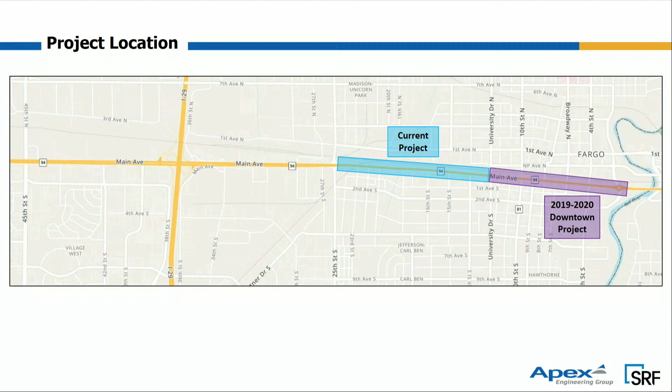Hopefully these stick drawings are not too hard to understand, but we wanted to develop a little bit of what the context is surrounding this corridor. As I mentioned, there's 4 miles of Main Avenue within the city. So if you look at the top of the slide first, 45th Street to 25th Street, of course, has the 6-lane section. It's got 3 lanes in each direction. You have raised median, you have turn lanes through that whole area.

And then to the east of our project, the mile that goes from University Drive to 2nd Street, a little bit different section there. Of course, a lot of you are familiar with that, but we ended up with more of a hybrid section there. As you can see on the east end of it, it's more of a 3-lane section, 1 lane each direction with that center shared turn lane. And then as you head west, you develop that second through lane. Of course, there's some parking mixed in there as well downtown. But it's kind of important to understand the context of these surrounding corridors when we talk to you today about some of the things that we're looking at for this particular mile stretch of Main Avenue.

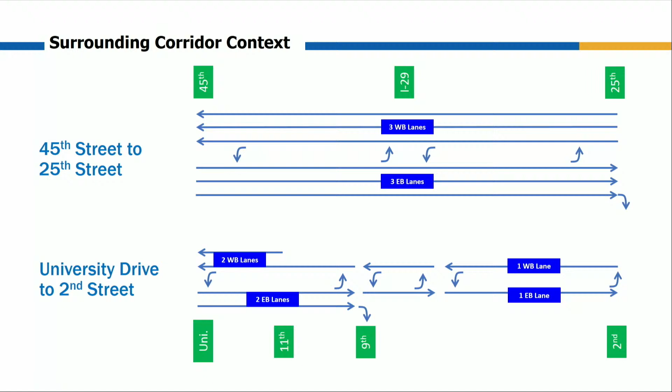So with all these projects, we always start working with our project review committee team on establishing the true purpose and need for the project. Really, what are we trying to accomplish? And we did go through a lot of versions of this and worked for a few months with our project review committee. But it kind of boils down to these 4 items in more of a general sense. And I did want to highlight bullets 2 and 3 in particular.

One of the things we really want to try to do out there is improve the pedestrian environment. Anybody that has walked out there or tried to take a bicycle or something like that understands how tight some of those sidewalks are. There's an example photo here on the lower left. You can see there's only about 28 inches there between that International Market Plaza building wall and that pole that's right on the edge of the curb there. And then, of course, somebody threw a box in the way too, just to make it even more difficult in this particular case. But this is something really important to the project team to look at opportunities to improve this environment.

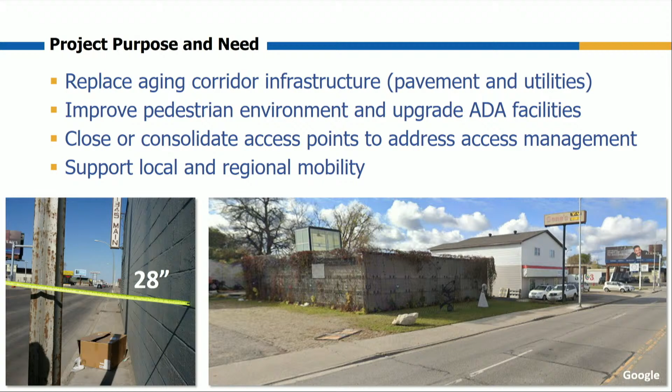You can see the photo here. Within this 200-foot stretch, there's about 5 driveways. You can see the curb just goes up and down constantly. So we've been working hard to do that, and Jake's going to present a little bit of information later on how we've been successful in trying to close some of those driveways.

So schedule and cost are always big topics, of course, on everybody's mind. So I wanted to just highlight these for you here today. So right now, our project schedule is to have this bid ready basically 1 year from now. That's our current schedule. So the project would bid probably sometime under this schedule in late 2023, November, say, of 2023. It would go to construction in 2024 then during that construction season. And again, that's our current schedule. We'll circle back to that at the end and talk a little bit about some things that could affect that.

And then as far as cost goes, right now, the DOT, of course, with this being on the U.S. and state highway system, they program these in well in advance. This was programmed in 7 years ago at about $15 million, and that's the amount that's programmed into what the DOT calls the STIP. And I've kind of broken that funding down for you here on the chart, and we can certainly answer any questions about this later if we need to. But you can see there are federal funds on the project, and then you have the state and city matches, and then you do have the city-only costs, which are typically for water main, sanitary sewer, things like that.

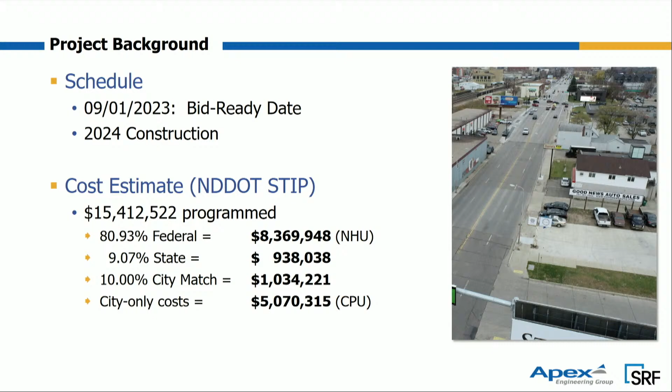Just on that quick question. Yep, absolutely. On 32nd Avenue, we found our costs went up quite a bit to $20 million, right? Mm-hmm. That $15 million you have, is that with inflation or you're going to tell us right now?

It's a great question, Mayor, and I was going to touch on a few of those things here with this slide. So that estimate was done in 2015. That's just kind of the way that the programming process works. It's kind of an understatement, I think, to say that those costs are very likely to increase. Of course, we all know what's going on in today's environment. So I think the question then is, well, how would that additional project cost be funded? And I've tried to list out a few bullets there.

Right now, it's hard to know exactly how it would be funded, but the good news is that those NHU funds, which is the federal funds, those are not capped. So if there is more money in that pool, which of course is not always a certainty, but if there is, there's opportunities to get some additional federal funding there.

But that would have to be matched with those same state percentages and city percentages that I showed on the previous slide. And then of course, any costs on the city-only items, which would be the water main and sanitary, those would be 100% city as those costs rise. So we're definitely aware of that as a project team. We are working on developing new preliminary estimates. We expect to have those done within the next month or so, and that's going to give us a lot better idea of where we stand there.

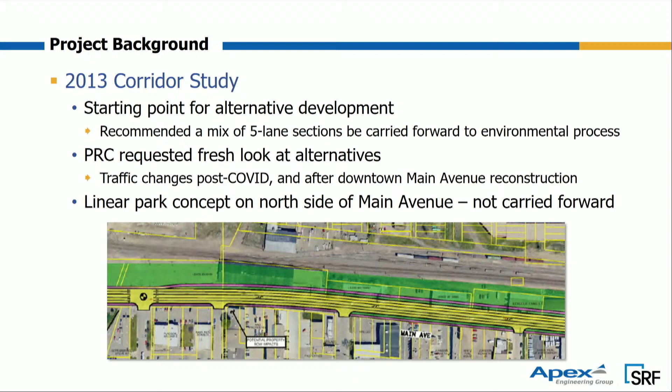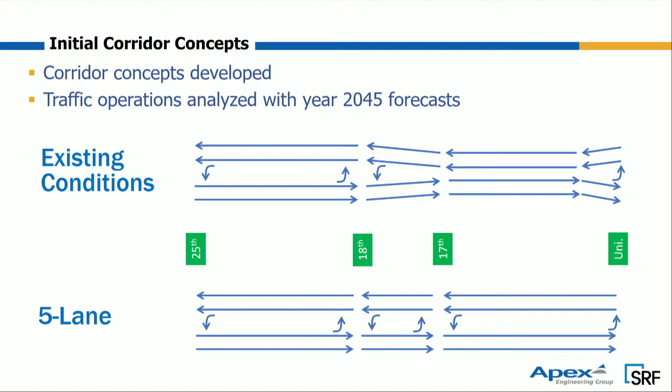We had the existing conditions, which essentially is what's out there now: 5 lanes west of 18th Street, 4 lanes with no turn lanes east of 18th Street. And then we also looked at a 5-lane, a 3-lane, and a 4-lane, and again just applied those with a broad brush to see what that did to the whole corridor. And it boiled down really to two bullet points there at the end. The no build and the 5-lane concepts had acceptable operations and no congestion. The 3-lane and the 4-lane concepts, when we applied them to the entire corridor, we saw poor operations, delays, and long queues.

How does that translate into calmer traffic in pedestrian, bicycle, people safety? As far as which section? The traffic flows, the number of lanes, the speeds, I mean, I hear you. When I hear you say poor operations, delays, and long queues, some of those might be beneficial if we're looking to calm the traffic, slow the traffic, and enhance bicycle, pedestrian, people safety. So I'm just curious what you...

True. And that's that balance, trying to balance all those needs of moving vehicles through the corridor and providing access to all the businesses that are along the corridor. But like you said, making sure that we create an environment that's comfortable for all users, not just vehicles, but pedestrians as well. I guess my question then is, did we build assumptions in that are to speed things up, or did we build assumptions in that are to slow things down, or to calm traffic down?

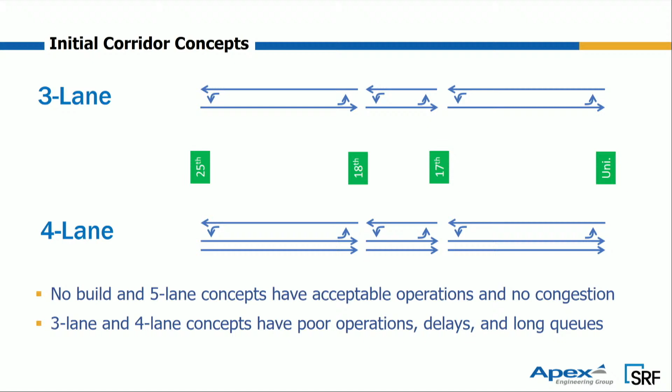So related to your question, Commissioner Preston, about vehicles doing different things when you go to a 3 or 4 lane concept, one thing we noticed that we would expect is that vehicles would start to divert to other roads. Our traffic team put this together: with a 3 lane, through the entire corridor, you'd see about 3,000 vehicles divert off to First Avenue North or Fifth Avenue South or other parallel routes. With the 4 lane, it was a little bit less, 1,500.

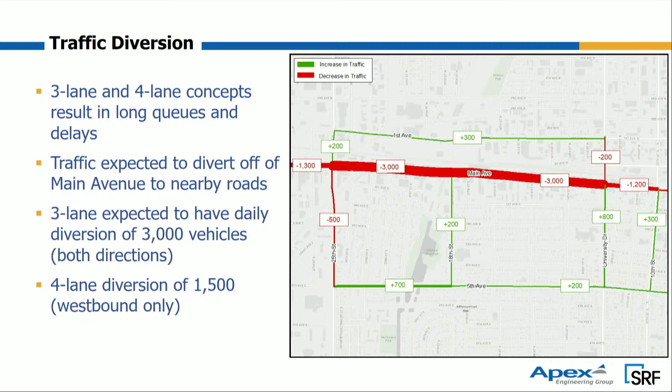So again, it's just driver behavior. If we do create that congestion in the corridor, they're going to look for other routes. So that was really our broad brush painting of everything. Then we wanted to dive a little deeper and see if we can use some of these components to build alternatives that make sense, because as I mentioned earlier, we have a really tight right-of-way east of 18th Street. So we wanted to see if there were some things we could fit in that section that might make sense.

And I know there's a lot here to digest, but bottom line, we broke the corridor up into components: the intersections and the portions between them, 25th to 18th Street and then 18th to University. The items in blue we carried forward to build our alternatives, which Jake's going to talk about in a minute. We also looked at the items shown in gray.

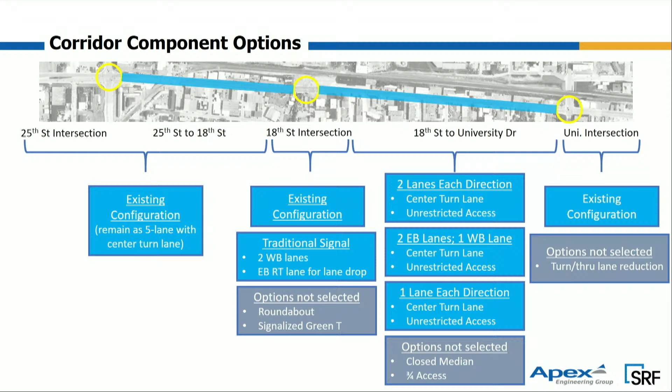We did want to look at some alternative intersection treatments such as roundabouts, and something called a green T, which I don't believe there are any of in Fargo yet, but it's a treatment used at T intersections sometimes. We also looked at raised medians and controlling access. Ultimately, though, the project team decided not to carry the items in gray forward.

So I'm going to sum up here and then turn it over to Jake, and he'll tell you about the alternatives that we actually did start to move forward with on the project. But to try to sum up some of this traffic analysis information, the current lane capacity, again, for vehicle traffic is adequate for the 2045 traffic. We don't have to add more lanes for vehicle traffic. However, if we try to reduce by 1 lane throughout the entire corridor, we start to see some operational issues.

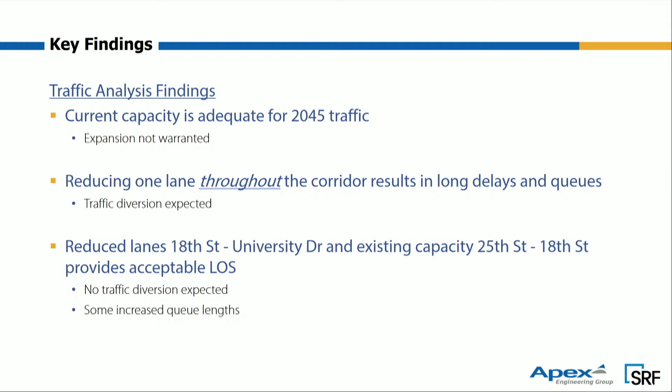But if you look at the third bullet there, we can combine those things. If we use the existing capacity west of 18th, but we look at reduced lane sections, something a little different than what's out there east of 18th, we did find that did provide acceptable level of service, which was what Jeremy was mentioning earlier. And with that alternative, we didn't see the traffic diversion because we still had that capacity from 25th to 18th Street. So those are kind of the takeaways that we found from that.

A couple other items here too. The crash history on the corridor is higher than average, but it's below what is considered critical. So there wasn't any immediate safety needs out of that related to the crash history, but we of course want to build as much as we can into our designs to improve those situations. And then I already mentioned the high number of access points, and Jake will talk a little bit about that here too. So with that, I'll turn it over to Jake.

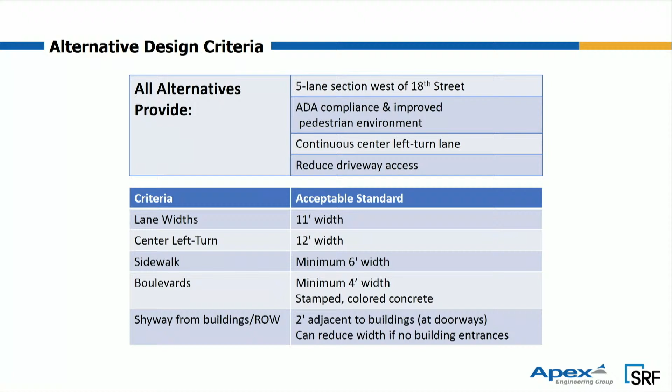All right, thank you, Matt. So we'll get into what alternatives we're starting to bring forward through this process based off of the results of the traffic analysis. Would like to point out that there are some goals based off that purpose and need that all these alternatives were developed to hit. And as Matt alluded to, we broke this corridor out into two different segments, from 25th to 18th, and 18th to University, based off the difference in the corridor widths of the right-of-way that's out there, with 18th to University being more of that constrained section.

So all the alternatives will have a 5-lane section. That's 2 lanes each direction with a center turn lane from 25th to 18th. That's currently what's out there today. But we will be making improvements to that segment of the corridor. ADA compliance will be improved as well as the pedestrian environment for all the alternatives. We will be providing a continuous center left turn lane. So that's a 2-way left turn lane down the middle for all of our alternatives. This allows vehicles to turn left and not block the flow of traffic.

If you know, that 4-lane section between 18th and University today does not have any designated center turn lanes. So anybody trying to turn left into any of those accesses has to do so in the travel lane. So those left turns, you're probably primarily talking westbound traffic heading south of Main. There's not much reason to go north of Main, or hardly any access points to go to. Well, there are accesses on the north side of Main. So you're talking like to the businesses? The businesses, correct, yes. So this will provide a safe way for the vehicles to get off of the travel way to wait to turn left into the businesses.

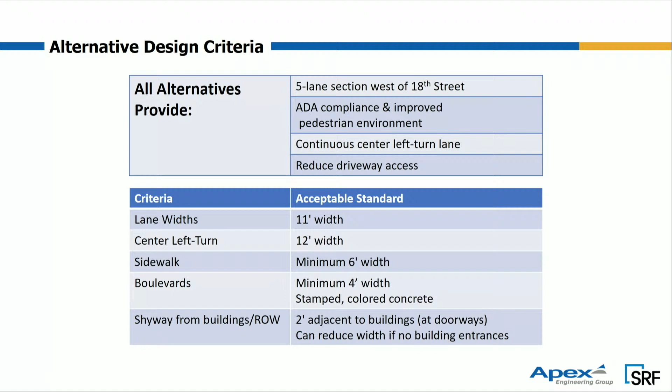So that provides a 4-foot separation from the back of curb to the sidewalk from oncoming traffic along Main. And then also where there are buildings, we do look to add an additional 2 feet of width to that right of way or to that building to provide more separation, so you're not so condensed in that walk area.

So with the alternatives, we developed 4 different alternatives. Actually 5 alternatives, but one of them being the no build, which is basically the do nothing option, which is an option that needs to be carried forward through the environmental process. So with this option, no changes are made, everything stays the way it is. Obviously, this does not meet the purpose and need of the project, but it is an option that we do have to carry forward to evaluate for the environmental process.

The 5-lane section, and again, all these alternatives between 25th and 18th are going to remain the same as far as the number of lanes, that 5-lane section. So really the discussion is going to focus on that corridor area between 18th and University, the eastern part of the corridor. But with alternative B, 5-lane section, this does carry the 2 lanes, both eastbound and westbound, through the entire project corridor with that center turn lane.

And as you recall from the corridor study, there were different options for this 5-lane section with shifting the alignment of the road to impact one side or the other more. But looking at the corridor, we are splitting the impacts between the north and south. So the alignment of the road does not change much. It may change a little bit depending on where we need to minimize impacts to the properties to the north and south.

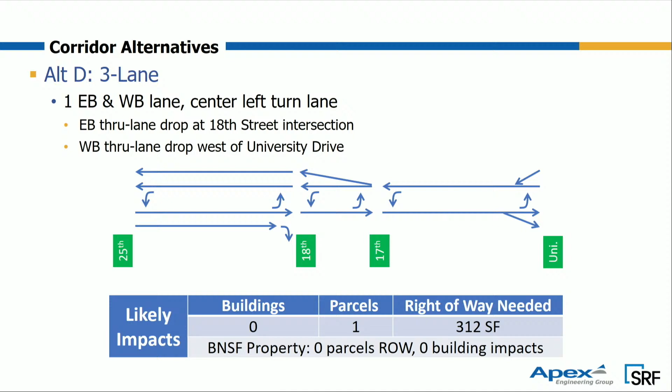We did also look at a 3-lane section, what we could do to reduce those likely impacts. So this option is being carried forward to look at as well, keeping in mind that we reduce some of the impacts, but not all the impacts from a right-of-way standpoint. But it also does reduce some of those widths for the pedestrian environment. And I'll go through those here next.

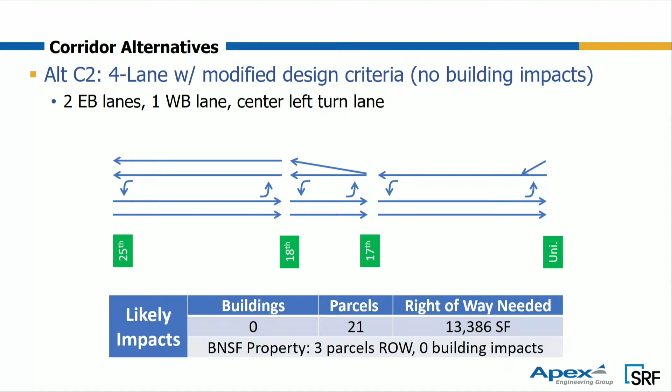So again, this is the same option as alternative C1, the 4-lane, just modified to reduce the footprint a little bit to minimize some of those likely impacts. And what those are, again, we're still meeting the criteria that we wanted to meet with the purpose and need, but we would reduce the outside lane width, so that's the furthest north and furthest south lane, to 10.5 feet. You'd still have your 2-foot gutter to the curb, but that 10.5 feet would be reduced. The center left turn would reduce from a 12 to 11 foot.

And then the sidewalk widths, the minimum sidewalk widths that we would try to shoot for in those constrained areas is 4-foot width with a narrower boulevard. And there's different widths that go along this corridor. We would still try to hit the desired, which would be that 6-foot walk with the 4-foot boulevard.

But in the areas from that picture that Matt showed in that constrained area, we got a building on the north and south side, some of those pinch points. That's where that flexibility with the design would allow us to narrow up the sidewalks and the boulevard to fit it within the existing corridor as best we can. But once you get past those constraints, then it would go back out to the desired section.

So where would bicycles go? On the sidewalk? Or do you anticipate they'd mix with the traffic flow? The bicycles would go on the sidewalk. This isn't a bicycle route. I think there's designated bicycle routes on First Avenue South. So we would want to direct them there if at all possible, but obviously you can't control that.

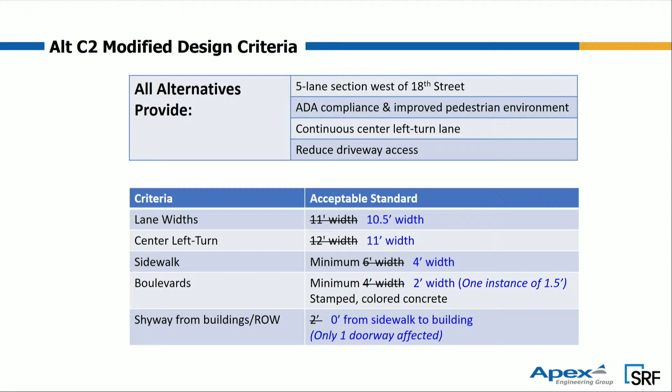Right, and in these constrained areas too, where we would have to reduce those widths to minimize those impacts, we wouldn't have any vertical obstacles in that reduced width section, light poles or any of that. There wouldn't be an additional obstacle for pedestrians. Those would occur after those constraints. Yeah, I'm just trying to get it in context, 4 feet versus 10 feet. No, I think the next slide is going to be a good one for you.

Yep. So we did go along the corridor, and this is actually on the corridor that was just completed here a couple of years ago to really give that context of what would a reduced section look like versus that ultimate section that you're wanting to achieve along the corridor. So here's just one person walking. You can see on the very far left, this is a 7-foot spacing between the back of curb and that structure, that building. It's a narrow boulevard. You have about a 5-foot sidewalk in this segment.

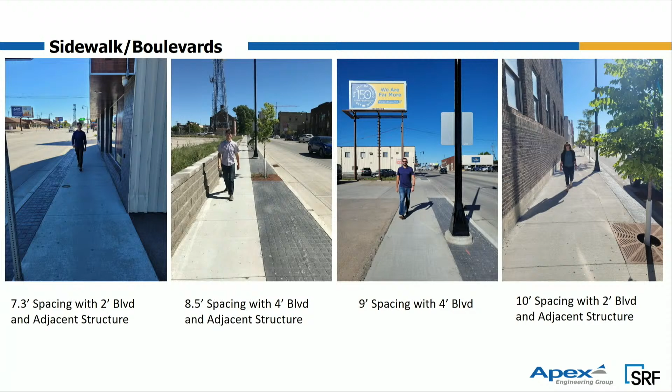Other one here, you got 8.5 feet from that retaining wall. You could assume that's a building too. In this circumstance, you have a 4-foot boulevard and then a 4.5-foot sidewalk. And then as you go down the line here, the wider options obviously provide a better pedestrian environment. And then we also did look at what it would look like side-by-side, 2 pedestrians passing each other along each of these different segments. So as you can see, the wider the sidewalk, obviously the better it is for the pedestrians passing each other.

So the one thing just to note is the segment we're talking about wouldn't have on-street parking. Right. So in downtown, we have primarily parking to protect the pedestrians, sidewalk to moving traffic. In this stretch, we wouldn't. So it's just something to think about as well. Yep, that's correct.

So the one on the far right, there is a 2-foot boulevard, but you can kind of see the jointing there when you look at the tree planter. If you would bring that boulevard all the way to the edge of that tree planter, that'd be your 4-foot wide boulevard. So that's your 6-foot walk with a 4-foot boulevard segment that we were discussing earlier.

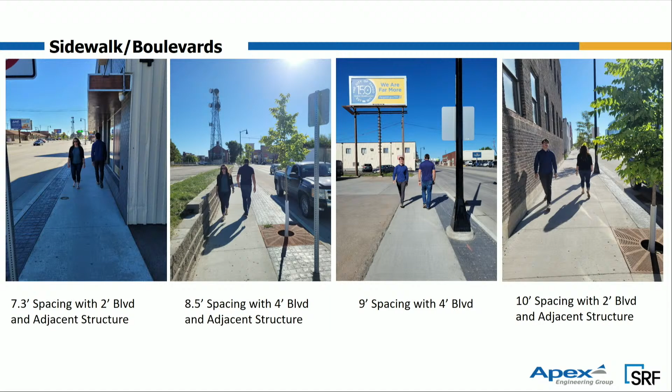And then talking about access management, there are approximately 80 driveways along this mile stretch. We did work very closely with the property owners, the business owners along this stretch. We held workshops that we invited them to come and discuss with us their property, how they use their property. And we also identified, if they have multiple access points within their property, are there opportunities to minimize or combine access points without impacting the operations of their property and their business.

And as a result of that, we were able to close 21 of those 80 driveways, and we're still working with some of the landowners on 8 of them. So that's potentially a reduction of 29 driveways, or a 36% reduction of what's out there today. It's been a really good process, and the property owners have been great to work with, and very, very helpful and easy to work alongside us on this. And those property owner conversations will continue throughout the project development as alternatives are selected and locations of driveways are finalized.

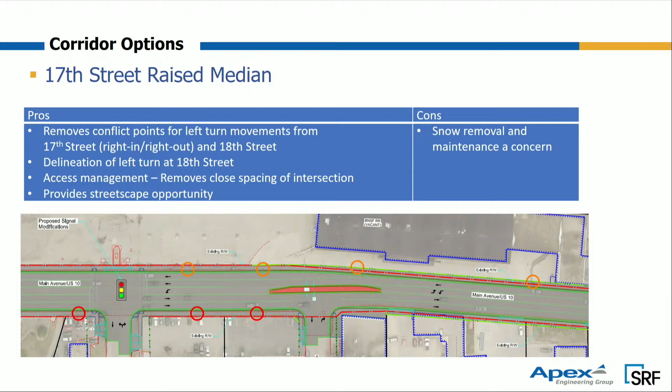And then streetscaping opportunities: depending on the section of the sidewalk and the boulevard, we are looking at providing landscaping opportunities along the corridor. These are just some of the criteria. There are a number of billboards along this 1 mile corridor as well that restrict any plantings within a certain zone as you get close to that billboard. But we are looking at these different options of planting beds where possible.

With some of the constraints, the planting beds are a little bit less of an option, but there are some options to add those. But tree grates, adding some trees along the corridor, and then also parking lot separation too, when there's parking lots adjacent to the sidewalk. We're looking at different options to separate that a little more.

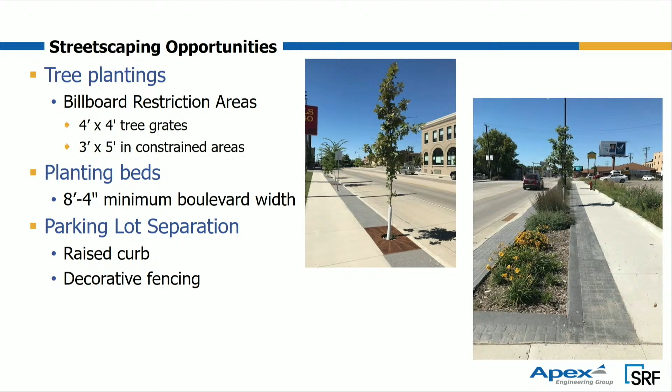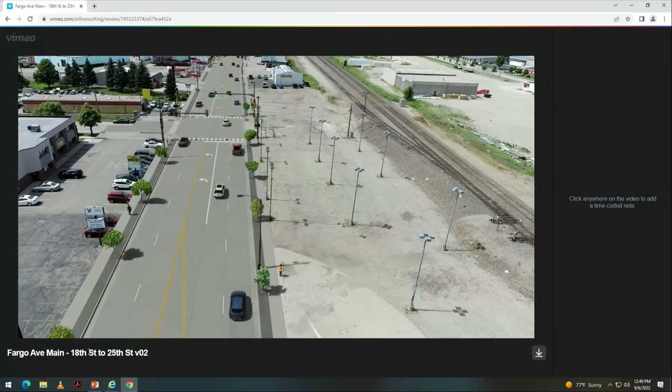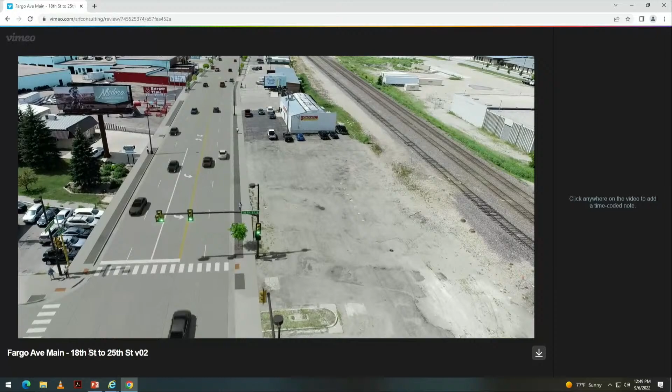So you're approaching 18th Street here at the signalized intersection. With this option, you have the 4-foot boulevards with the 6-foot sidewalk and tree planting options. These tree planting options aren't finalized by any means. It's just representative of what could occur out there. This will go all the way to 25th, but we're not going to run it that far, but you can see the different driveway locations along the corridor. This does include where we did reduce some of those driveways, so those would be represented on here as well.

All right, and then lastly, for mine, we are in the process of analyzing and comparing these. The top example is what was used for the last project between University and Second Street, really identifying what are those characteristics we want, what are the evaluation criteria. And below is some of the criteria that we developed as part of this corridor that we're going to be evaluating. And we're going to do the same thing. We're going to have a little bit more detail as far as how we develop the criteria and analyze it, but the color coding system, which is great, moderate, or poor, of how it meets the purpose and need of each of those evaluation criteria.

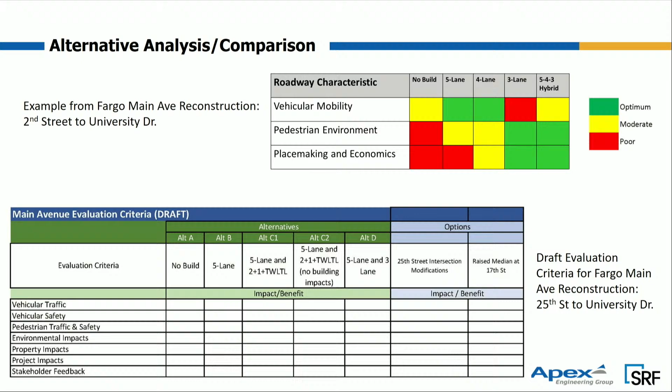Okay, thanks, Jake. I promise you we're almost done. I've just got a few other slides here. We do appreciate your patience and the questions too. It's really good discussion. So I just wanted to highlight a few things to be aware of.

We've talked a lot about some of the alternatives, but Jake alluded to it. Public involvement is very important to us on this project. We've worked hard from the beginning to try to do this the right way and get off on the right foot with all of the businesses and properties and neighborhoods. So just wanted to highlight some of the things we've been doing.

We, of course, met with the businesses and landowners a couple times. We've spoken with the board of the Jefferson Area Neighborhood Association, which of course is the neighborhood directly to the south of Main Avenue here. And then we do have our first public input meeting planned here for October 18th. So that's going to be coming up soon as well.

We've kind of talked about this as we've gone along, but the right-of-way and then also BNSF coordination is really important on this project. It's going to be a factor. They do have a spur crossing towards the west end. It only carries about 2 trains a week, but it's something that we do have to work with them on and look at. We're hoping to tie in or be done with our improvements before we get to that crossing, but that's still to be determined.

And then BNSF does own 4 properties on the north side, and I think some are probably familiar with the ones there, primarily in the center of the project around the 18th Street area. So any acquisition that we have to do there, we would, of course, have to deal with BNSF.

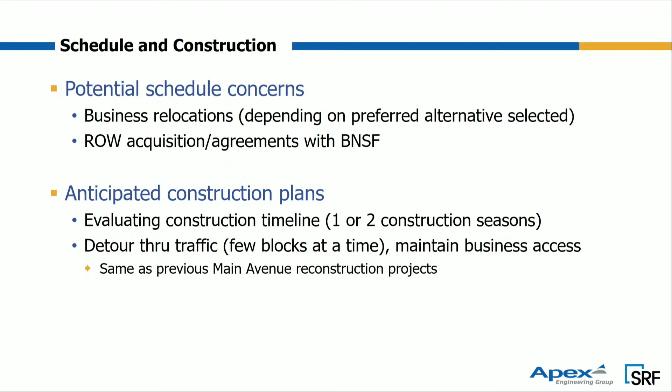And then the last thing I wanted to update you on, and then we'll open it up for any questions. With this being on the U.S. highway system, we did need to present to DOT management and get their input and decisions on how to move forward. And their recommendation, after seeing a similar presentation that we gave to you today, was to carry forward all the alternatives except the 5-lane alternative, which was alternative B. That would be the 5-lane through the entire corridor. They considered that to be too impactful to property and buildings. So certainly can answer any questions about that as well.

But so moving forward from there, we're going to just develop as much detailed information as we can on property, building, and business relocation costs, in addition, of course, to project costs, just to have the right information to inform the decision-making going forward. So with that, we are done with the presentation, and we'll welcome any questions.

Mr. Chair, I have a question. It's for Jeremy. Jeremy, obviously the previous section, to me, went very well, the construction part of it. Is that kind of the same model we're going to follow for this, from the perspective of the businesses? Can you talk a little bit about that? Yeah, there's no way we can allow traffic to go through there during construction. So we would bite 2 or 3 blocks at a time.

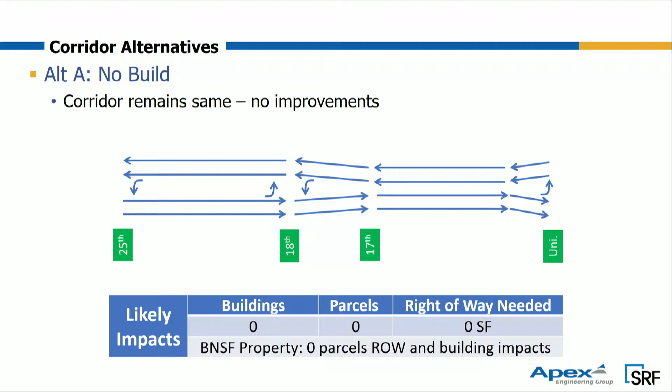To just have 2 lanes each direction in that stretch? Exactly, this picture as an alternative. We don't have that section as a build alternative. That was discussed, but ultimately it was decided with the team that it didn't meet the purpose and need to put that section back. That's a section that, of course you had to fit it in here, but it's not really implemented as much anymore with new projects. A lot of times those are being reduced down to a 3-lane with the center turn lane. I think there's examples in Fargo, 42nd and those areas.

The roadway footprint of the 4-lane is the same number of lanes that are out there today. It's just you change one of those westbound through lanes to that center turn lane. No, I'm following that, but if you look at the businesses that are north and south there along Main Avenue, many of the businesses on the south aren't frequently a left-hand turn in. I mean, it's a car lot, it's different things on that side. My curiosity is presently through cars do pretty well.

Now you're going to have a pinch point here, and then you'd have a pinch point when you get closer to downtown Fargo, Broadway, as you pinch into that one. So you'd have double pinch points. If you come west on Main to University, that's a busy intersection. North, south, east, west, people are taking right, left, whatever they're doing. But it would almost seem that you're going to have a pinch point here if you go to 3 lanes. Correct?